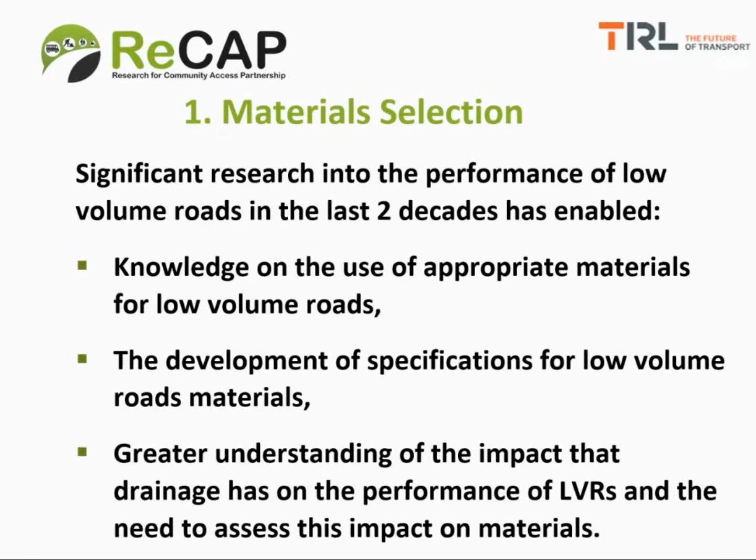Now, the principles of selection of materials should be as follows. 1, before selecting materials for use, you should always think of sustainability. That means use only the required quantity and quality of materials for your project without wasting material unnecessarily. The second principle that you should bear in mind is that the knowledge of performance of particular materials in particular areas and the local experience gained in use could override imported specifications.

And the third principle to bear in mind is that often if your materials do not meet specifications, please consider mechanical modification with another natural material before considering chemical modification. And the fourth principle is that where possible, consider the effect that the material will have on the internal pavement drainage. And the fifth principle is that chemical modification should only be used if it can be shown to be economically justifiable. And lastly, you should be aware that gravel size and cobble size materials offer an option to use construction types such as macadam or Telford constructions, so they should not be unnecessarily discarded.

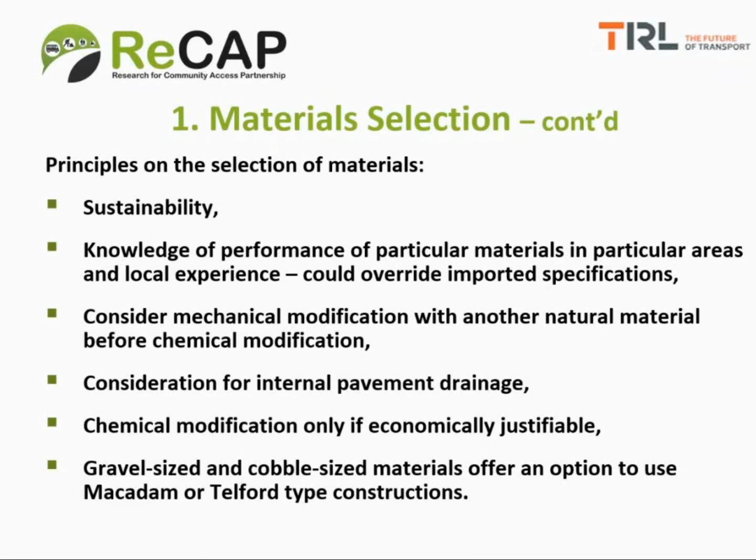Now, test methods. There are several test methods that are used in different countries. For example, countries use the AASHTO test method, others use ASTM, others the British standards, others TMH, which are now referred to as SANS, and in some cases they're also country-specific test methods. Now, these methods, even for the same test, will have minor variations in procedure. These minor variations in procedure can sometimes yield different results for the same material, and therefore you should not use or mix these test methods arbitrarily.

Now, material characteristics can also sometimes change during extraction, stockpiling, batching, and compaction. An example of a material that changes in handling significantly is scoria, also sometimes known as cinder gravels. It therefore means that verification tests should be conducted at different stages and necessary adjustments made to maintain the quality used for design.

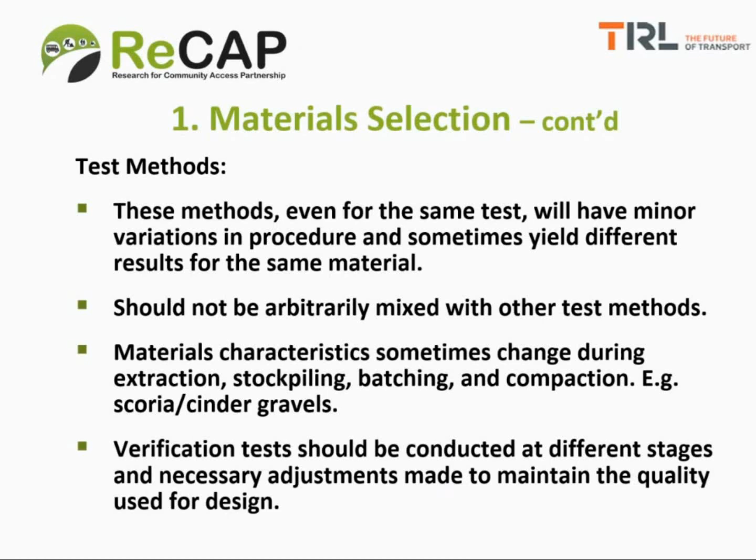We now consider how we can use materials that present certain predominant characteristics and how we can deal with these characteristics and use the material in road provision. The first one on our list is high plasticity materials. Now, high plasticity is often associated with clay content of the fine fraction of the material. And plasticity is often assessed by Atterberg limit tests and linear shrinkage tests.

Now, the problems which high plasticity materials can present is high absorption of moisture. And with the high absorption comes weakening of the material and swelling, which causes deformations on the pavement. Now, when these materials lose the moisture, they shrink and crack, and the cracking allows more moisture into the pavement. So it becomes a cycle. Now, this does not mean that high plasticity materials cannot be used. They can be used if you take care of them by providing what we have always been talking about, that is adequate drainage in the form of an adequate crown height, adequate invert depth, and use of sealed shoulders.

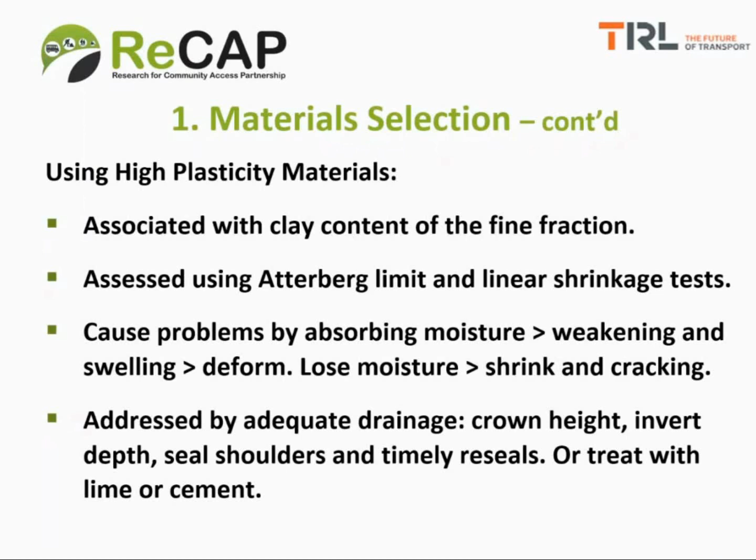Now, the next category of material that we shall discuss are poorly graded materials. Now, grading of materials is assessed mostly using particle size distribution tests. And poorly graded materials can present a variety of problems depending on the grading. For example, coarse graded materials will often result in poor stability in the pavement.

And if used in the upper pavement layer or the base course, it can often result in potholing, a high binder demand to fill in voids, a poor surface finish, and for fine materials, they can often present problems of low shear strength, especially again when used in the upper pavement layers. They also have a potential for allowing capillary rise to manifest in the pavement structure.

And for gap-graded materials, they are often difficult to compact, and with that comes poor stability. And because of the gap in the materials, fines can migrate from lower pavement layers and contaminate upper pavement layers, thus altering the properties of the upper pavement layers, often resulting in a loss of strength.

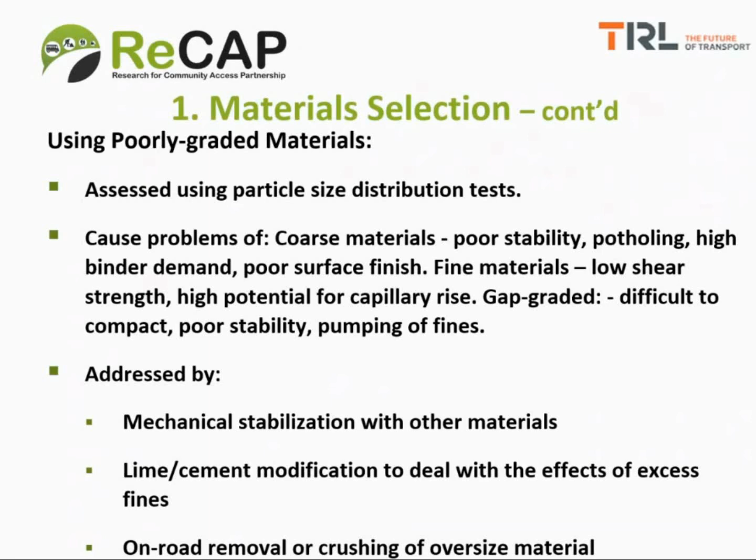Now, the next category of materials are those with particles that are poorly shaped. Now, this is manifested through either rounded particles, flaky particles, or elongated particles. And they are usually assessed by visual inspection for rounded particles and flakiness and elongation tests.

Now, materials with poorly shaped particles can present a variety of problems. For example, rounded materials offer poor stability and are also very difficult to compact. It's almost like trying to compact ball bearings. Flaky or elongated materials often end up breaking down under traffic or crushing during compaction, and some of them even rebound when they're compacted. An example of that are materials rich in mica.

Now, poorly shaped materials can be used in pavements provided that you either crush the materials if the particles are rounded, or you carry out mechanical modification with other materials, or in the case of flakiness or elongation, this may require a slightly more expensive approach by modifying crushing processes and altering the setting of crusher plants to high impact crushing.

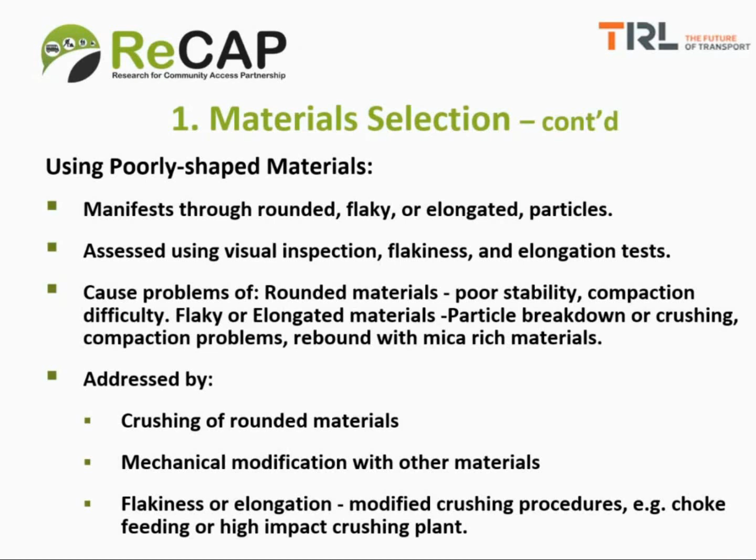The other type of materials that you need to consider are materials with low particle strength. And low particle strength is often caused by inherent defects in the fabric of the material, such as foliation. Now, they can also be caused by incomplete or weak induration for pedogenic materials, or by weathering in situ.

Now, particle strength is assessed by a variety of tests, common ones being the 10% fines aggregate crushing test, the aggregate impact value test, and the aggregate crushing value test. Low particle strength materials can present a variety of problems. They can break down under traffic or under compaction. They often result in reduced strength when compacted, and the particles that break down can often generate fines that are pumped into the upper layers of the pavement.

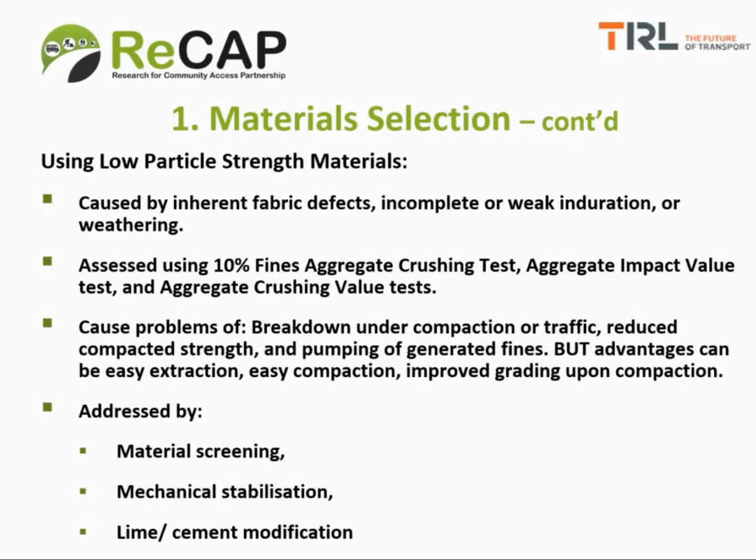But they also offer some advantages in that they are easily extracted, they are easily compacted, and sometimes their grading improves upon compaction. Therefore, if we are to use these in pavement layers, we have to address the characteristic by carefully screening the material during extraction to make sure you have slightly bigger particles so that when they are compacted, they break down to the correct size. You can also mechanically stabilize the material, and as a last resort, you can carry out lime or cement modification to give it more bulk strength.

Now, another category of materials are those that have low durability. Now, durability is defined as the ability to maintain mechanical or chemical integrity over the design life of a road. And durability is assessed using also a variety of tests, such as the Los Angeles abrasion test, the sodium and magnesium soundness test, and the durability mill test or the Texas ball mill test.

Low durability materials can cause a number of problems, such as degradation in service and subsequent loss in strength and stability. And once that occurs, then you expect cracking or rutting to occur with all its associated functionality problems. Again, this can be addressed by material screening, mechanical stabilization, and lime or cement modification.

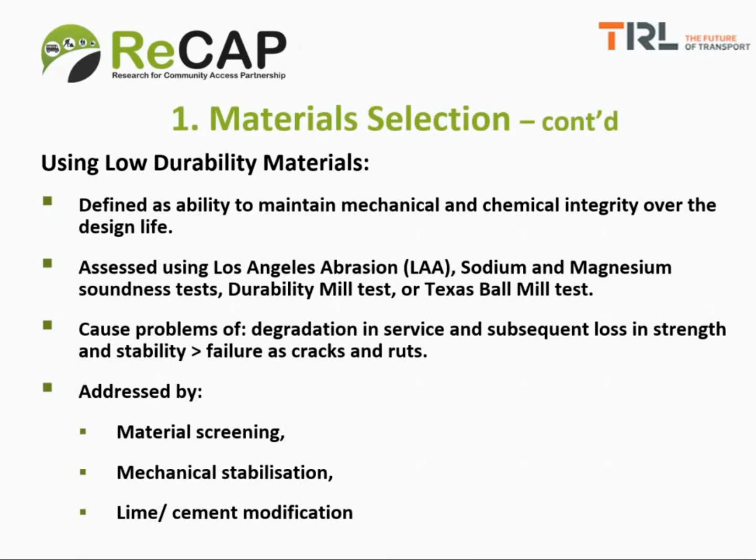The method uses a matrix system, and the matrix has got traffic on one side and the probability of mean annual rainfall exceeding 500 millimeters per year on the y-axis. Now, it's a 3x3 matrix, meaning that there are 3 traffic classes and 3 risk levels of rainfall exceeding 500 millimeters. And therefore, you will end up with 9 cells into which your rainfall fits and your traffic also fits.

So depending on which cell your design conditions fall in, materials and their risk levels are then provided so that you're aware of the level of risk involved with using materials of certain characteristics. And the 3 key characteristics that are presented for the different materials in this case are the fineness ratio, the grading modulus, and the shrinkage product.

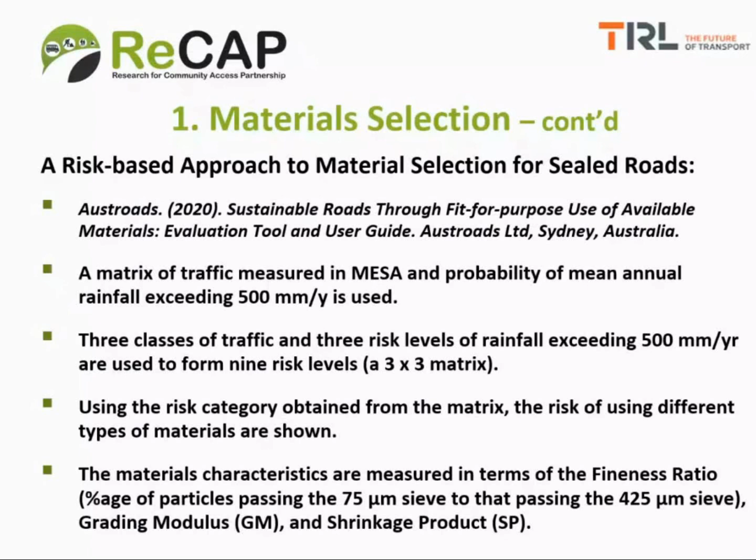Now, let us look at material specifications. For all the pavement design methods discussed, material selection, as discussed in the previous slides, should be used. That means you should pay consideration to the predominant characteristics that are described. Now, for CBR-based methods and also for the DCP-CBR method, specifications are often given in terms of strength, and strength is measured in CBR in this case.

Particle size distribution envelopes, you may find up to 5 envelopes which you have to choose from or comply to. Other times, the particle size is measured in terms of the grading modulus or specified in terms of grading modulus. Plasticity is specified in terms of plasticity index, plasticity modulus, linear shrinkage, or plasticity product.

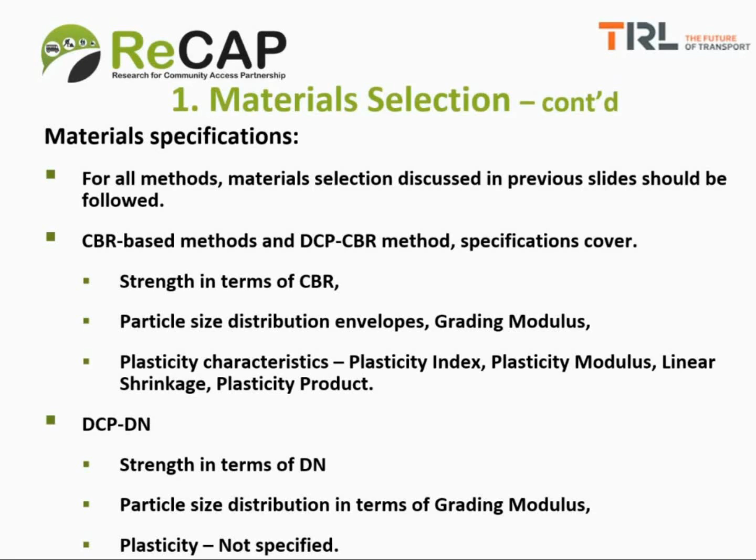For the DCP-DN method, strength is specified in terms of the DN value, and particle size distribution is specified in terms of grading modulus. Plasticity, though measured, does not have a specification in this method.

Now, material specifications for empirical pavement design methods take on a very simple form, in that these methods, such as the Telford and macadam type constructions, often only specify particle size distribution or dimensions of particles that must be used. And they occasionally also specify the crushing strength of samples of the material. And this goes as well for rigid pavement options such as concrete. Now, the methods, because of their pure empirical nature, often give elaborate construction instructions. So the specifications are very simplistic, as you can see.

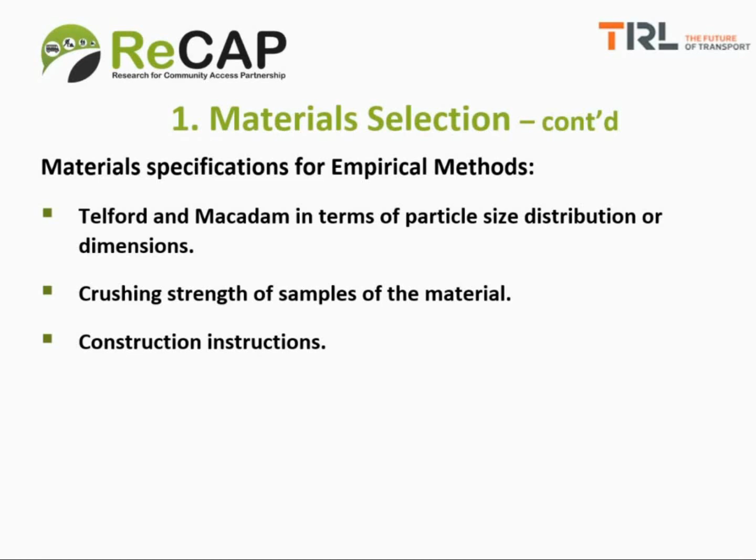Now, for gravel roads, the focus of material specifications is on the wearing course. And the wearing course also acts in most cases as the structural layer. Now, the aim of selecting or specifying materials for gravel roads is to minimize gravel loss and roughness. And we have provided layer thicknesses for different design traffic levels up to 0.3 MESA in Chapter 6 of the RRN. There are also additional specifications to make sure that gravel loss and roughness are minimized, and also that the material should be able to withstand some amount of traffic.

And these are in terms of strength measured as CBRs, particle size distribution envelopes, grading modulus or grading coefficient. Plasticity is specified in terms of plasticity product or shrinkage product. Once again, the Austroads publication also provides a risk-based approach to the selection of wearing course materials in terms of grading modulus and shrinkage product.

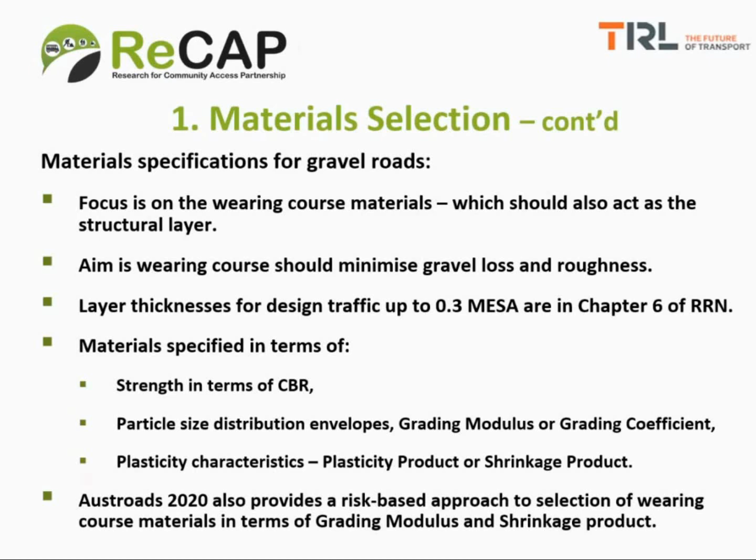Here is an example of a chart to help in the selection of wearing course materials for gravel roads. Now, you may not have the luxury of having different materials to select from, but the chart in that case will show you what performance to expect from the different materials that you have. Bear in mind that these charts may need to be calibrated for local conditions of rainfall and for the volumes of heavy trucks that use the roads.

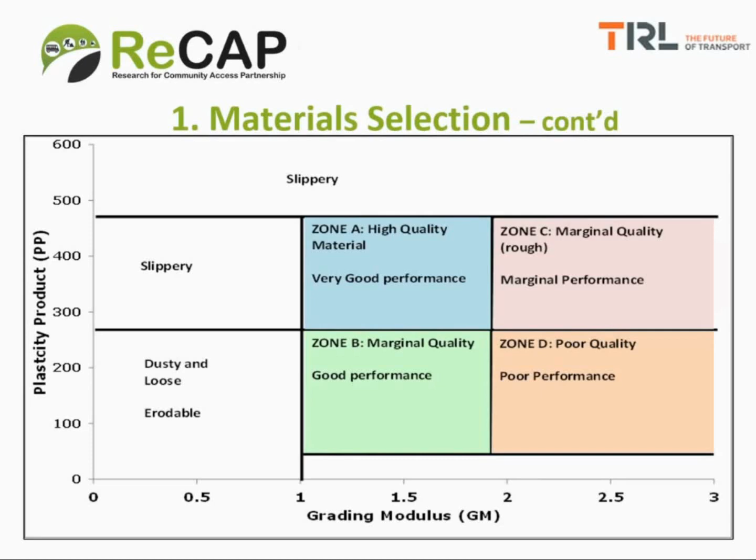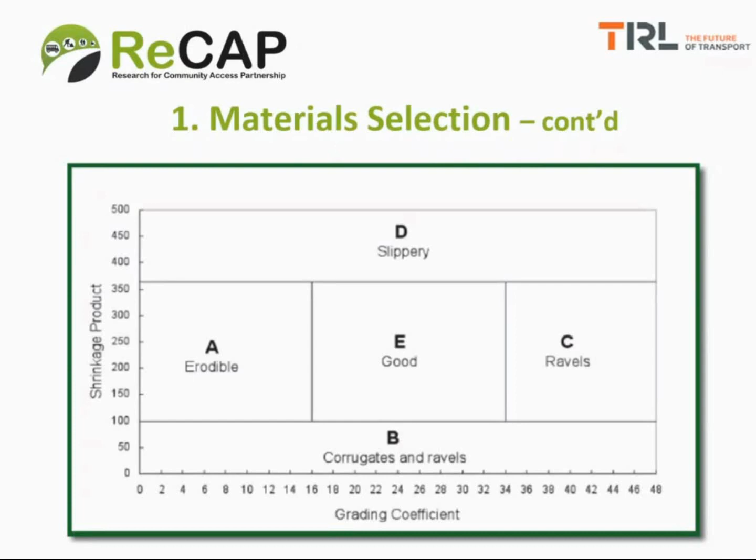Another presentation of a similar chart here uses the shrinkage product and the grading coefficient. And once again, these charts all need some calibration for local rainfall conditions and truck traffic.